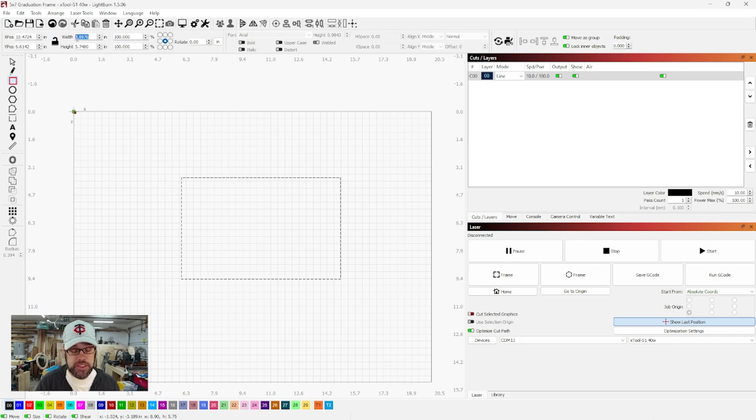So we're going to start by using a rectangle tool and draw out just any rectangle. We want to make sure the aspect ratio isn't locked, and then we're going to come up here and adjust it to our width, width being 7, height being 5. There is our base cutout for the actual photo itself.

And now we need to develop our frame. What we can do in LightBurn is just use our offset tool, taking our object here, and we do want to go outward. LightBurn does give you the option of your corners, so it can be just a square corner, you can do a bevel corner, or you can do round, depending on the style of frame you want. You might want to play with those. We're going to stick with the straight square corners.

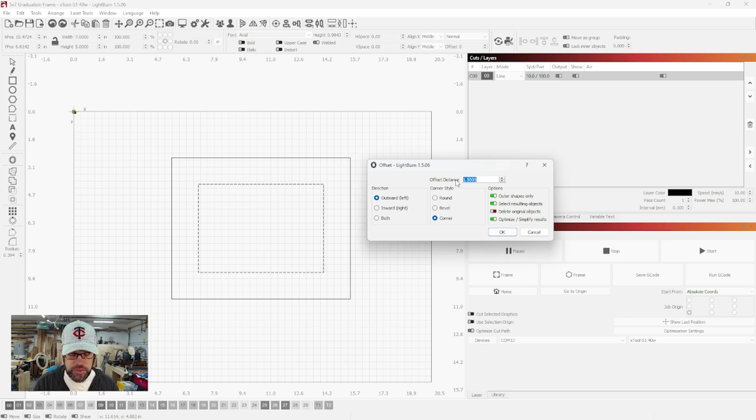We do not want to delete the original objects, but here we can also play with our offset distance. So this looks about right, or maybe you want to adjust it to a certain size based off your original one. We could adjust it to 1 — that doesn't look good. We could do 2 — that looks a little wide, so I am going to stick with the original 1.5 we had in there. Hit OK, and that's going to drop that line in there for us.

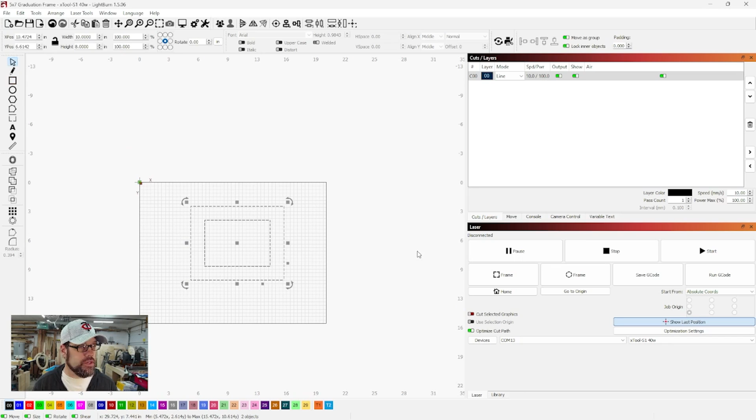So here's our basic back side of the frame. We can just go ahead and use our selection tool. I'm going to grab both of these, do a Control-C to make a copy, and bring that over here. Now this is going to be our back. As I said, the inner square is 5x7, which will allow us to pass our photo in, and then we'll use that cutout as the backer.

We'll add a couple of clasps on the back to hold that in place at the end, but let's jump back over to this one where we want our front. Now we need this to capture the photo and hold it in, so we're actually going to need to bring this original square in just a little bit. Doesn't need to be much — you don't want to block out too much of the photo. So I'm going to go with about a 1/4 inch.

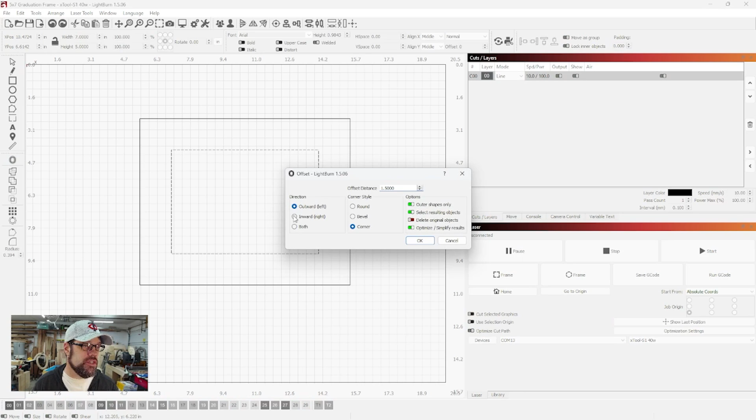So here we are going to want to change this to inward. We're going to stick with corner, but here we are going to adjust this to 0.15, which is going to be our 1/4 inch.

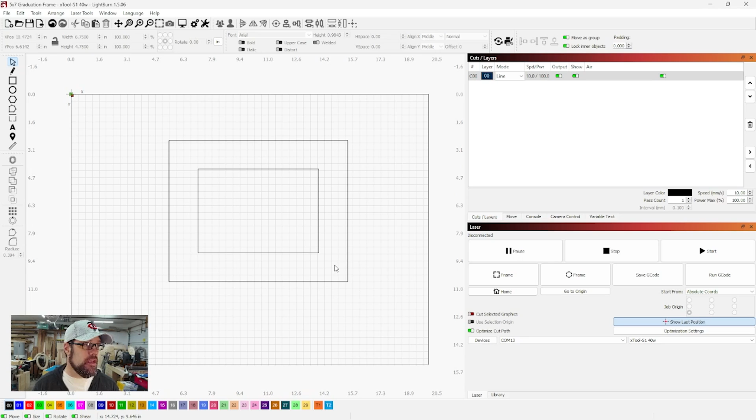From here we can start playing around with our design. I have in my clip art library a graduation mortar board, so I'm going to bring that in. These are just things I've collected from various clip arts or drawings I've done. You can play around with balloons for a birthday, or a cake, whatever the occasion is, some Christmas type things. We're going for the graduation style, and we're going to play with this item.

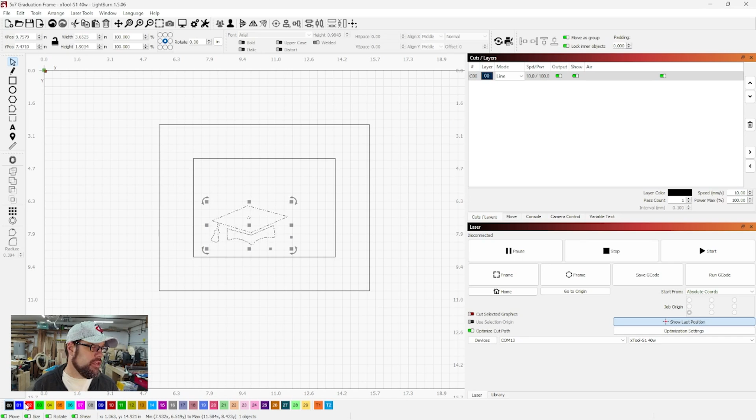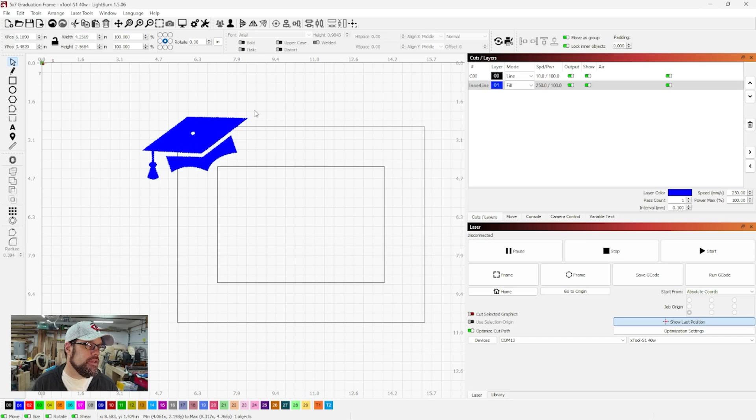Just to give us a little contrast, I'm going to put this on a fill layer so we can see it better. What I want to do is place this up in the corner. This kind of gets to your eye, how you want this to look. I actually want this rotated just a little bit, and let's increase the size some as well. So we're going to have it kind of off this corner. It can take up some of the space, but we don't want it covering the photo frame here. But I do want it to get that corner. Whatever catches your eye, however you feel this needs to be designed, whatever size you want.

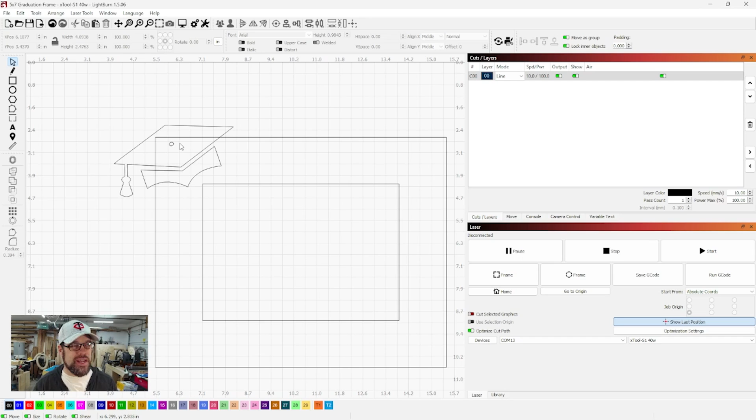I'm going to leave that there, that looks pretty good. I'm going to drop this back into the line layer. Now what we're going to do is offset this because I want to have a backer to it. I want to not just glue this onto the corner and have it hanging out there, which you could, it's personal preference, but I want a nice border. It'll give it a nice offset of colors to have that in there.

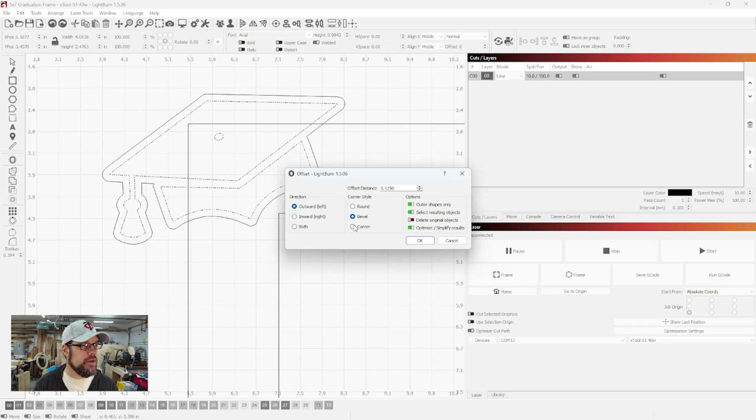So I am going to take this object, come back to our offset tool. We don't want to delete the original object, we want to go outwards. Here we want to play around with the size. I don't need a huge reveal on this, so I think we're going to stick with that 1/8 inch. We got that in there, 0.125, we got it outward. The corners, it's rounding them out here, just the way it's factoring in what it wants. So we're going to stick with that, but we'll go back into Node Editor and fix that.

Once we're happy with that, we'll hit OK. I'm going to come back to this original object, drop that on the blue layer, it just kind of visually helps me see things. And I'm going to come back and select our new outline, and play around with node editing a little bit just to clean it up before we combine these.

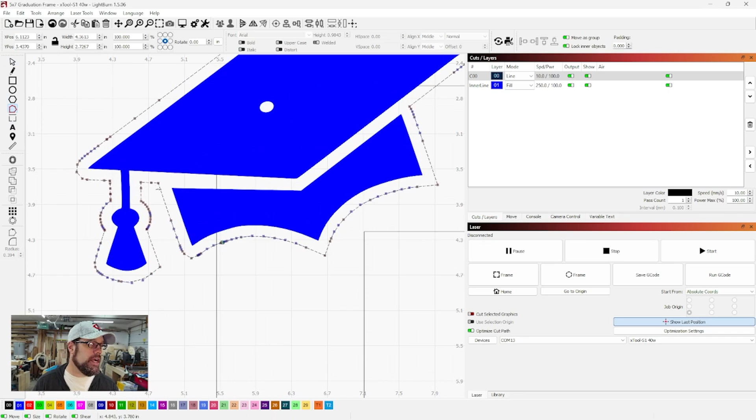So come up to our node editing tool, and this will highlight all the individual nodes we can mess with. A tip here, if you hover over it, you'll see the options for edit nodes. You can convert lines, delete nodes, insert nodes, trim lines, break shape at point, things like that. We're going to be focusing on deleting nodes for the most part. So I'm going to scroll in here and start by cleaning up some of these extra nodes. We really don't need all these.

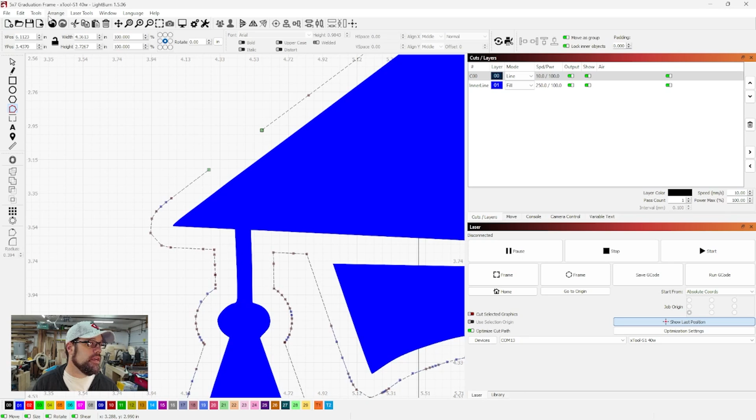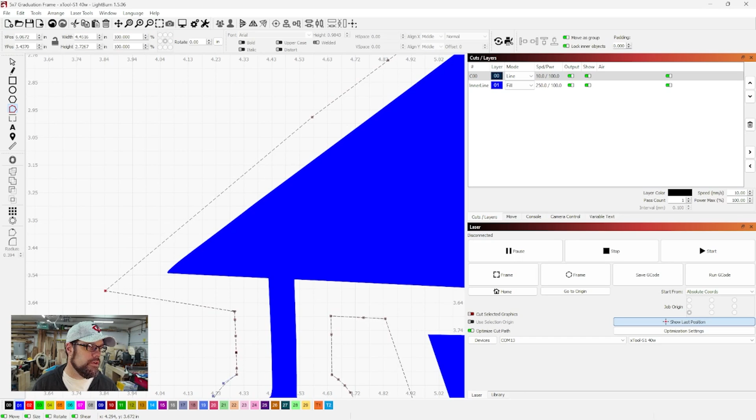I'm going to undo that because I grabbed the line instead of the node. We want to make sure we're hovering over the nodes and not the line when we do this. This will help simplify this into a more straight line, because I am actually going to try to make these more pinpoint corners here. So I'm going to try to delete some of these extraneous items, and as I'm doing that, I'm bringing this back over to where I want it. I'm trying to have a fairly consistent 1/8 inch reveal around the outside, but I do want it to be fairly straight. So I'm just going to clean all these up, and we'll jump right back to the next steps.

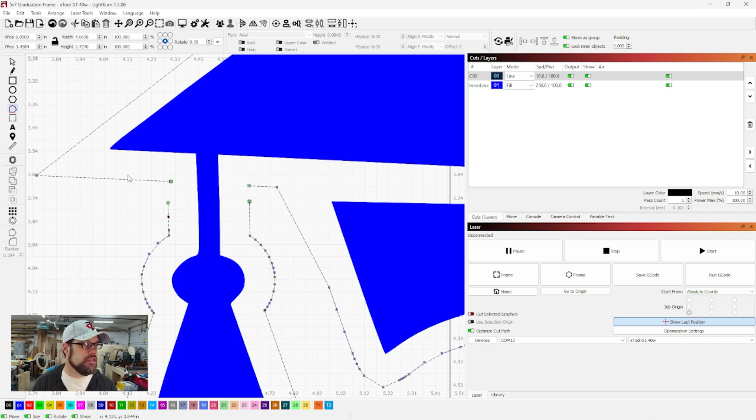We're going to delete this line, and then I'm going to drag this over and kind of lock it on there. Let's undo that and clean this up a little bit more. Yeah, I'm good with that.

So we've got our base node editing done. I'm going to delete this line, and now what I'm going to do is combine this with our outer line.

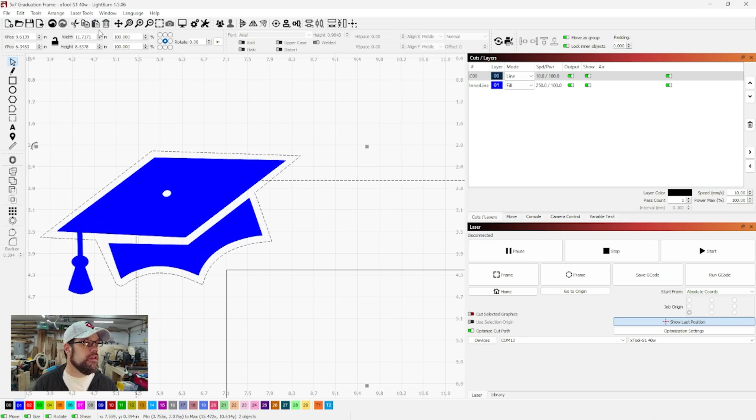We're going to come back into our Boolean Assistant. A Boolean Assistant is nice when you want to combine two shapes but you're not sure if you need union, intersection, or subtraction. You can bring up this tool and mouse over each one, and it'll give you a preview of what it's going to do.

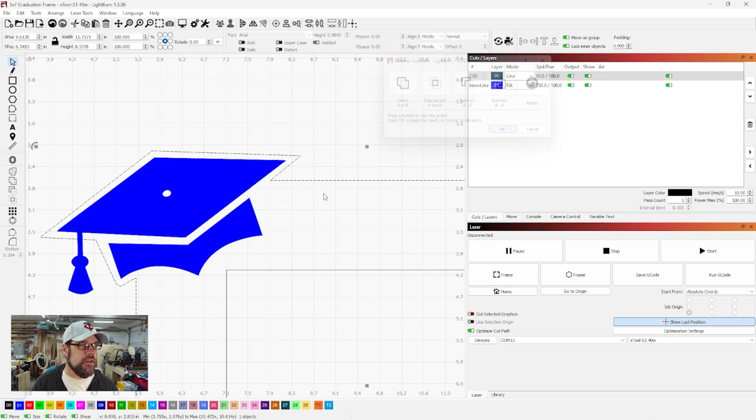So obviously we want to combine the two, so union is going to work for us, and you'll see that this creates a nice smooth line around the outside here. Gives us something to adhere that mortar board to, and then we'll have the tassel just kind of hanging off. I think that'll be a nice look. That completes that part of the frame. It's looking good. We've got our backer, and we've got our piece that we'll end up cutting out.

Now let's go ahead and add our text. I'm going to grab our text tool and put 'class of' and the year down below here. We're just going to start with the words 'class of,' and I want two different fonts here.

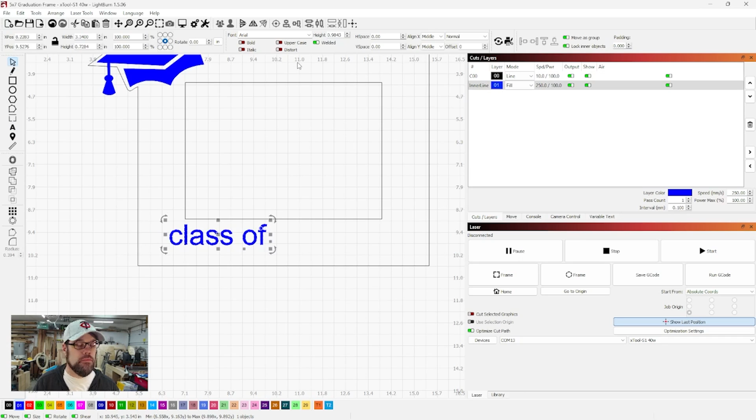So I'm going to do this in two sections. I want something a little more flowing, a little more script-like, so the script I'm looking for is brush script. This gives it a nice cursive look to it, and we can roughly size this in where we want it.

I think we're going to want to enlarge this a little bit. We want this to take up about half the space down here, but I really want the emphasis on the year, so I'm going to eyeball this for now.

Yeah, something like that. We're going to come back and add our year, so again 2024 for this year. But here I want this to be a nice bold statement, so we're going to change the font to the one I use a lot for this, which is Impact. If you don't have these fonts on your computer, you can add them through your system fonts, but make sure that if you're selling it, you have commercial rights to that font.

So again here we're going to scale this. I'm going to maybe enlarge this a little bit and try to place it where I want it, hanging over into this side. I'm going to enlarge this again just a little bit, bring this down, yeah, about there. I'm kind of eyeballing this.

You can use your alignment tools, so as a matter of fact, I'll do that. I'm going to select both of these, and we can come up here and do our horizontal center to get them placed there, okay? Now we can, as a group, adjust it to where we want it, and this comes down to your personal preference of how you like it.

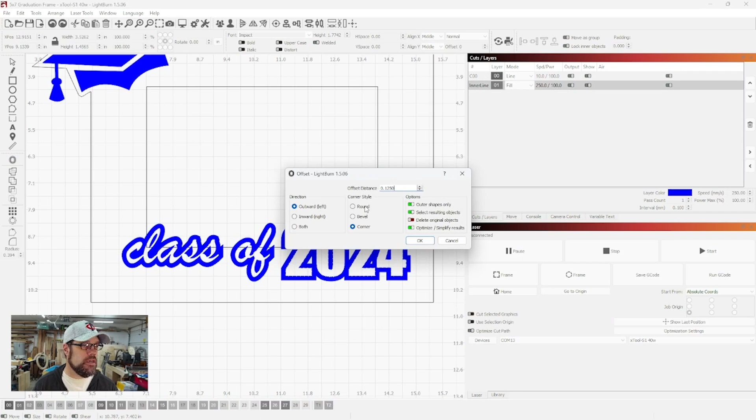But we're going to stick with that and do the same thing for the date, the year. Again, 1/8 inch offset outward. We don't want to delete the original. All right, so we have those. Now I'm going to put them on our line layer just to make this easier, it makes it a little bit easier to see these things.

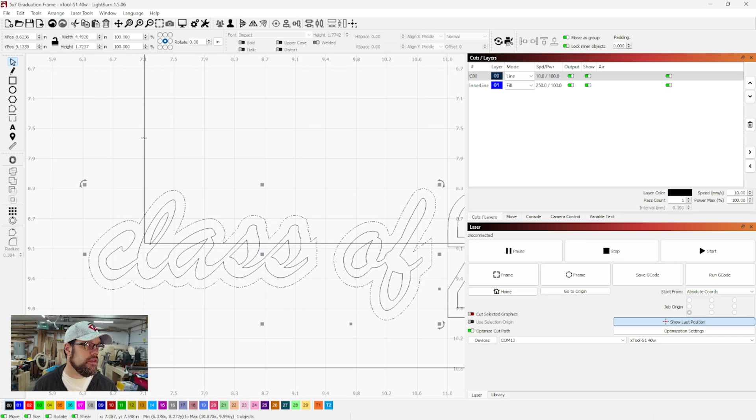And here again, we want to combine our outline with the inner part of the frame now. So I'm going to select the outline, select the inner frame by holding Shift, and bring up our Boolean Assistant again. Here, if we use union this time, it's going to combine the two. We don't want that. We don't want intersection. We actually want subtract B from A.

The A from B and the B from A is just the order of what you select them in. So we're going to go ahead and hit that. And then we're going to do the same thing over here with the year. So we're going to select those two, bring back our Boolean assistant, and subtract B from A.

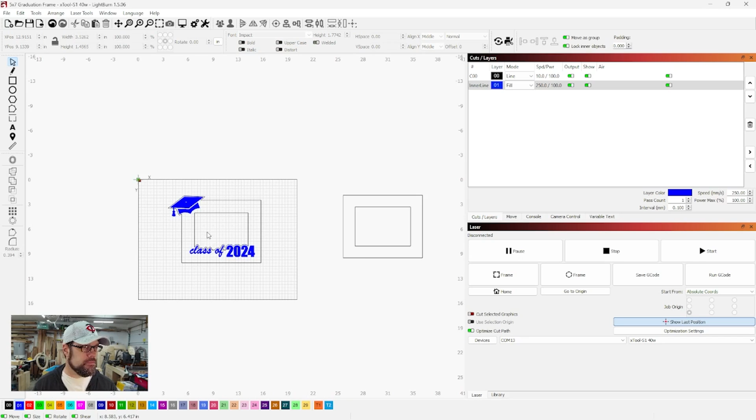But the idea of this, if I put these back into our fill layer, you'll kind of get that raised letter effect. There is the front of our frame. We've got our text in, we've got our background to glue them down to, both for these. This is basically ready to cut out. Now, I do want to get this set up right, because I think we can get all this maybe to fit on the inside here.

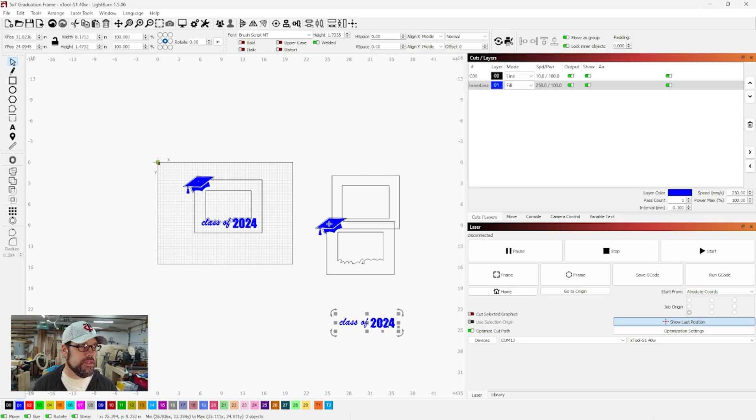Now's a good time to save your work. I'm going to go ahead and do a Control-C and Control-V just so that we have this over here. No, I should not have quite done it like that. All right, let's move this. Let's move this. And we'll move this.

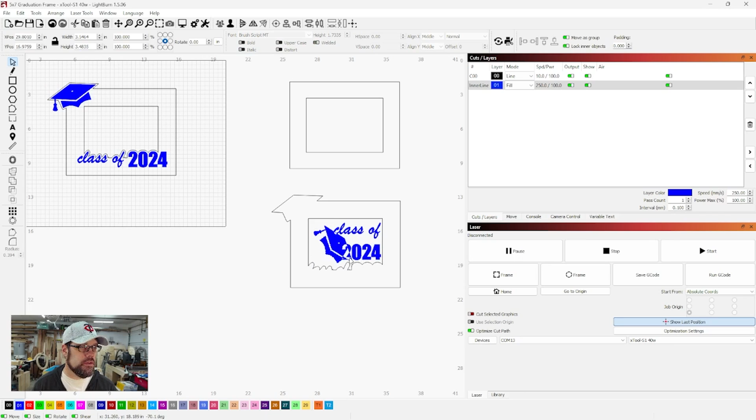So now what I want to do is see if I can fit the words, because this part is just a blank. It's not going to be used. These parts are going to be cut out. So maybe with some fancy rotating and placement, we can get these to fit in and not waste any material. Looks like we should be able to do that.

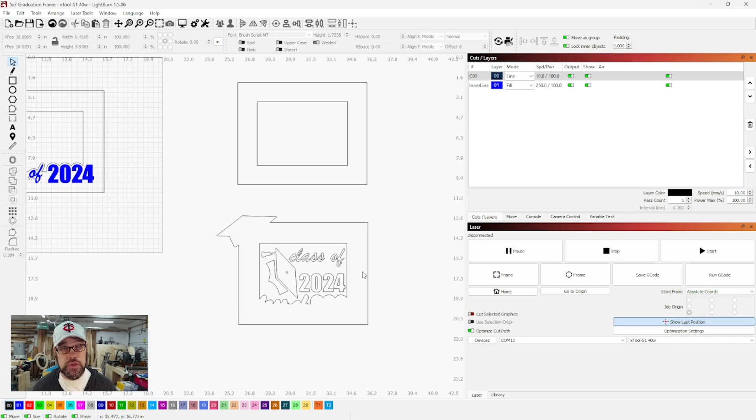There we go. So those will cut out of the middle, because I'll actually change these to outlines, so they're going to be all cut operations. So we'll cut the front, we'll cut the back, get those cut out on laser, and then we'll be ready to paint them. But let's jump into XCS and kind of walk through those steps so you can kind of see the design process there as well.

All right, we are over here in XCS. And so a lot of the steps are going to be the same, but the tools are a little bit different. So let's jump through this really quick.

All right, we're going to start out making our frame again. And so we want to start out by drawing a rectangle. And they have the same things over here for adjusting our size. Of course, we want to unlock the aspect ratio. And you want to go with width and height here. This is your X and Y coordinates where it's placed. So you don't want to do the wrong ones here. So we're going to go ahead and start out with the 7 wide by 5 tall.

And that will start the beginning of our square. And I'm going to move it in the middle. Now they do have an offset tool in here. It's called the outline, and we could try to use that to create the outline again. However, if we do this at 1.5 inches, you'll notice that it curves the corners. And if you want that style, great. But if not, we can't use the offset tool in here.

So instead of that, we're going to need to draw our other rectangles. So I'm going to come on the outside here once again, draw another rectangle, and here we want to add 3 inches to the width and height because we want that 1.5 inch border. So for our width, instead of 7, it's going to be 10. Our height is going to be 8. And got to remember to unlock that aspect ratio. So we've got 10, and then we want 8. And then we can kind of grab this and center this as well.

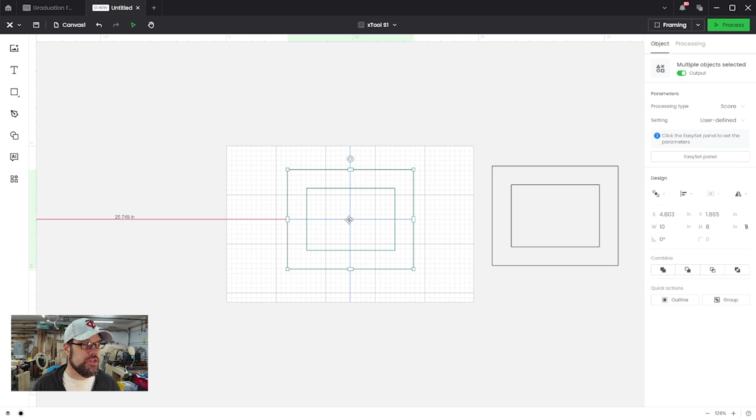That way, making sure that both of these are centered and organized. So there's our back. We can go ahead and move that off to the side for now, and then I'm going to copy it and paste it. Now here we of course want to adjust the inner one again because that needs to get sized down. So let's try our outline.

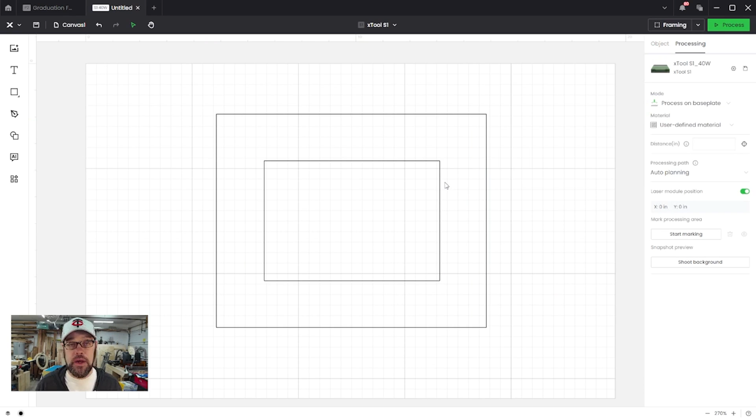We're going to bring this as a negative 0.25, see how that looks. And we still have square corners, so we're good there. So all I'm going to do is select our original one, delete that. Now we have the frame that's going to support the photo.

So now again, we want to just work through adding our text. So let's go ahead and add our text down here. We'll drop that in, and let's type 'class of', and again, of course, we want to adjust our font. So we're going to come here to the font, and you want to select a similar script style. That looks close to what our other one was. And then we can go ahead and hit weld on that. That will put all of our letters together.

I didn't point that out in Lightburn. By default, it sets to auto weld, but you can unselect that. Then we can size this up a little bit to get it roughly where we had our other one.

Now let's go ahead and quickly add in our date, 2024. Again, I want to find a bold impact style. Let's see, hopefully it'll bring it in over here. There it is, there's our impact font.

If we wanted to, we can adjust our font size here. But we will just grab the corners, drag it up in size, park it where we think we need it, make it maybe a touch bigger.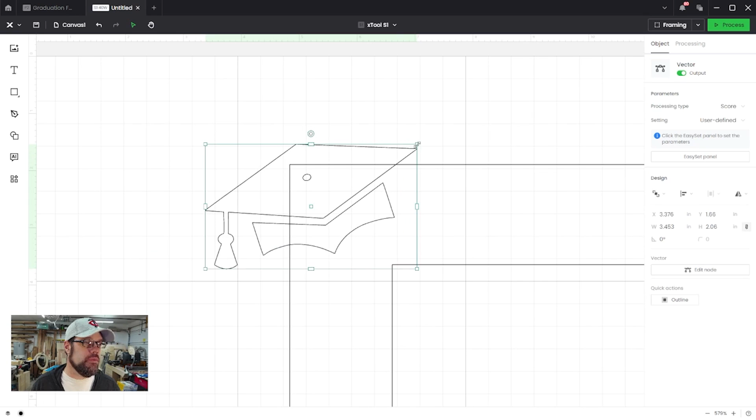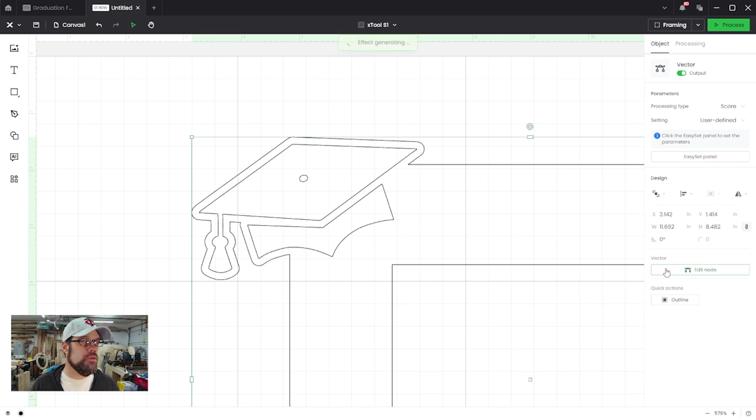So here again, we can scale this to the size we want, rotate it however we feel we need, and then we can do our outline. Go ahead and up this to an 1/8. Hit OK. Now we're going to take our two objects and unite these. That will give us that outline, and then I'm going to switch this over just so you can see it better to engrave. Now we have basically the same object within XCS.

So kind of the same result, and then we could move these around. We could set up our cut file here and send it off to the laser. Hopefully this worked well to show you the design features, very similar between Lightburn and XCS, just some slightly different tools and features. You could of course go into XCS as well and use their node editor and clean things up as you see fit.

But wanted to give you just kind of an idea of decorating up this frame. So what I'm going to do is send this off to the laser. We're going to cut it out on the xTool S1 40 watt. We'll get the parts cut out, and then I'm going to paint them. We'll get them glued together and see how this looks. So let's jump into that.

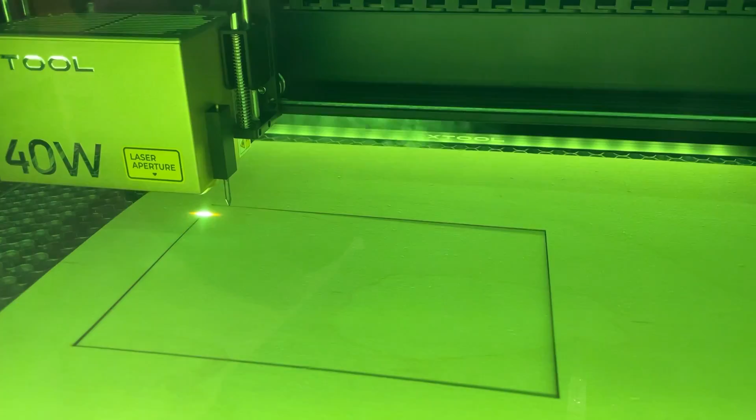So I'm going ahead and using some flat black spray paint on the base of the frame. I end up using a few coats, letting it dry in between just to get it nice and even but not drippy. Then on the letters and the mortarboard, go ahead and do the same with some flat white, making sure to cover all the edges and the surface.

Once that's all dry, we can bring in - I'm using some Starbond CA glue and accelerator, putting just the CA on the piece that'll be glued, a little accelerator to make it set quickly. You want to act fairly quickly with this, as that accelerator will make things set up, so you want to get them in alignment.

And then just following that up, using the outlines to try to align our letters on both the sides there. And then the numbers, again using the outlines we put into the frame to kind of line them up. You could create a little bit of a jig with a cutout, but I found this to be fairly accurate. Then just dropping in a ruler at the bottom to get this nice in alignment.

So we're going to go ahead and glue the back to the front. I did leave this unpainted so we get good adhesion. Using some wood glue with a little bit of CA glue in pockets just to act as a bit of a clamp, but then did follow up with some small clamps to hold this in place while that CA glue sets up.

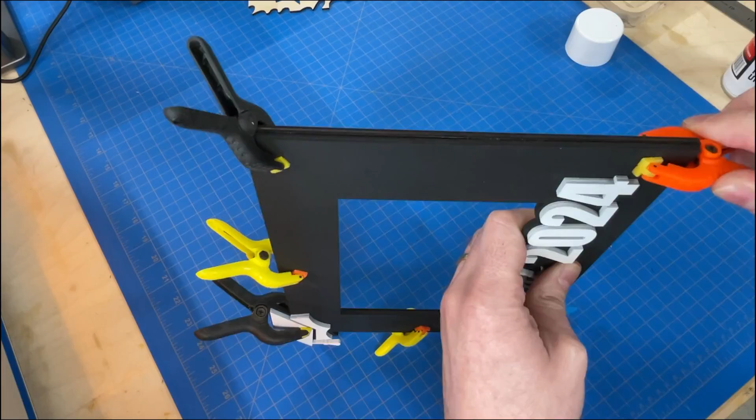With that complete, we can work at fixing the back. So I didn't show creating these, but these are just some clasps that I laser cut out, and then I'm going to drill and screw in place just tight enough to hold it there. I found that just 2 on the side should work, using these small brass picture frame screws that are about 3/8 of an inch because of the thickness of the material, and just making sure that they're snug enough I can barely rotate those, but that they'll hold it in place.

And then in case you want to hang or set this on a table, I do have a file that acts as a plate or a picture stand, so just cut that out of some 1/8 inch material, put it in place, and it can be displayed on a table as such.

So here we have our completed sign as well as a stand that you can set it on. Now you could obviously attach a little wall hanger to this if you wanted to hang it on the wall as well.

The only thing that I would recommend: cut this out of 3mm or 1/8 inch material like I did, but you're gonna need to get yourself some pretty small screws to attach anything to the back of this, because we've got barely a 1/4 inch, just a little over a 1/4 inch to work with here. So you might want to make the main frame out of 1/4 inch material if you can, or the whole thing. It will get a little bit bulkier there, but that will give you a little more options on an easier job to find some hardware.